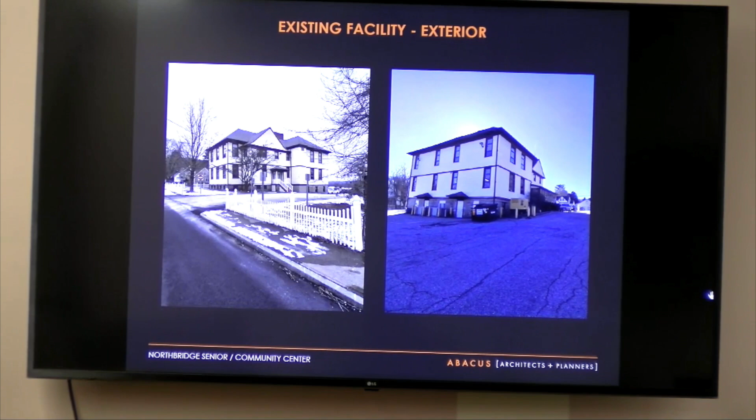So the existing facility, you're here, you know what this is like. It's kind of a handsome building, but never ever today would you design a senior center like this, as handsome as the building is. Whoa, it's 4 feet above the ground.

If you have mobility issues, it's pretty tough. It's actually a 3-story building.

Again, not great for mobility issues. The site is small, practically all covered with asphalt for parking, but there's not enough parking space and not much left for green.

And we know parking's important, but green's really important for physical and mental health, and there's no place to put it. The interior, you know it because you're here. Sure, it's functional, but there are some odd-shaped rooms that don't facilitate flexibility in the kind of activities and the number of activities that Kelly and her staff could have moving forward in a town this size.

So, floor plans - these may not be familiar if you're not an architect, but they're buildings with good bones. You add a little here, you renovate there, you can make it work. This building has bad bones for a senior center.

Meaning, if you tore out all the walls, it didn't really make sense. The roof would collapse. There's nothing left. The kitchen's right in the middle.

Well, you can't see why I point like that, so you're always walking around the kitchen and up and down stairs and up and down the elevator. I mean, you know this.

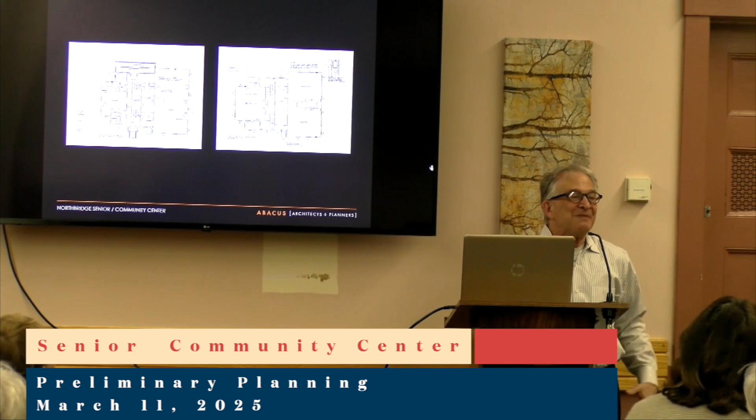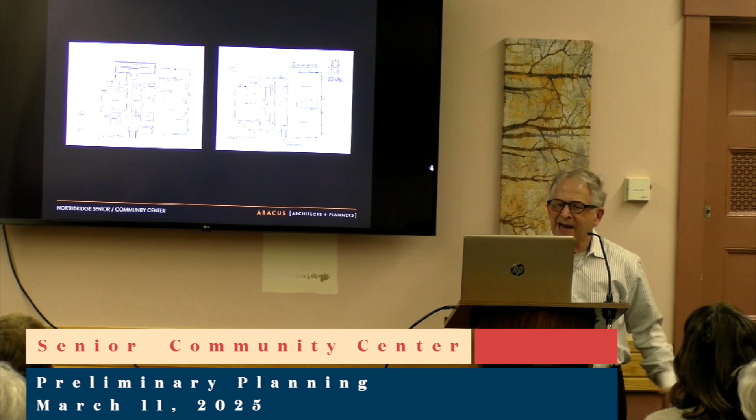And the offices are spread all over, not because the people here don't like each other, but because there's no place to aggregate offices together in a way that really works. If this is easily resolvable, it could be resolved right here and right now, but that doesn't seem to be the case.

So the limitations of the site - it's away from the town center. If you live a block away, it's a perfect location. Most people in most places want to be near where they can go shopping, the bank, and town hall. You're pretty far away. It's a small site with little green space.

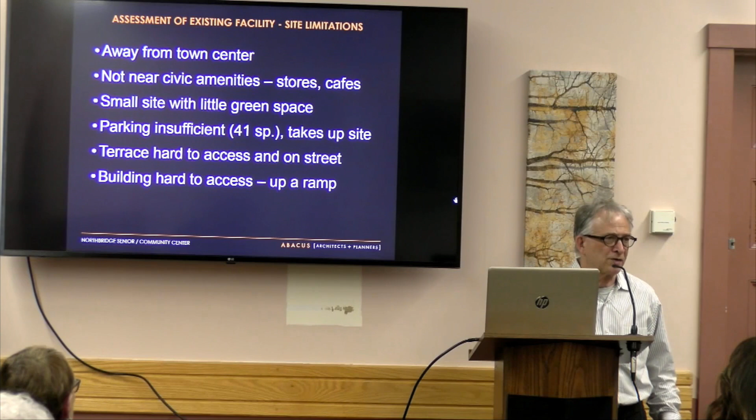Parking's insufficient. There is a terrace, but it's hard to access - it's right on the street. And that ramp, they did an okay job doing the ramp, but if you didn't need it, I think everyone would be a lot happier.

The building limitations: 3 stories tall, the entry's really cramped, offices dispersed, things are hard to find. What we hear over and over is, I want to be able to walk in the door and see what's going on and where my friends are. The convoluted hallway, the kitchen, 8,000 square feet.

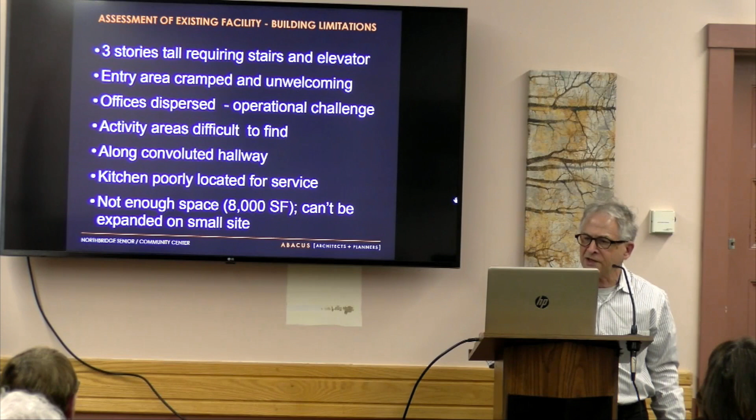And this is sort of rough, because the basement is as big as the building, but there's only this much usable space despite the best efforts of Kelly and the staff to make use of it. So those are some of the limitations of programming.

What we hear over and over again is, I come for the yoga, that's 45 minutes, and 2 hours later I'm still here because I'm hanging out with my friends. This doesn't facilitate hanging out the way community centers, senior centers, high schools, office buildings do - it doesn't matter, people kind of want the same thing.

And there's poor connection to nature and the community. If you could walk outdoors and be in a wonderful green terrace and do yoga outside... but ain't gonna happen here.

So this is basically saying it's not working. People are trying hard, it's not working. So that is, one could say, that's one reality: you have a senior center that doesn't meet today's needs.

And guess how the demographic trend lines are going? I don't know about you guys, but I'm getting older, and my friends are getting older, and there's more and more need. A building that's too small isn't working.

The good news is 44 Cross Street is a town-owned piece of land that's significantly bigger, and there is the opportunity to do a new senior center there. So that's what we've been studying.

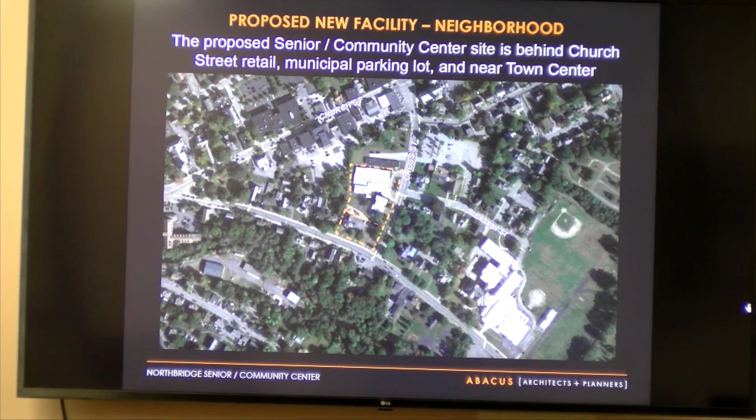So there it is. The school is that big white block within the orange outline. That school is going to disappear, and the contract - there's a demolition contract out there - so that big white blob, that will be gone.

And the red outline shows the outline of the site. There's a town-owned property to the left and a church on property to the right. We've been having discussions with those people, and there may be the opportunity to work together. You know, what form that takes, we don't know.

So far, our investigation has been saying, let's just stay within the red outline, with that big white blob having disappeared. You see all of these squiggly white lines - that's the topography.

Every line is a foot rise in the ground, so you can see at the corner of Linwood and Cross Street, you're not going to build much there. It's really steep, there are beautiful trees that will be preserved. Where the school is, it's reasonably flat.

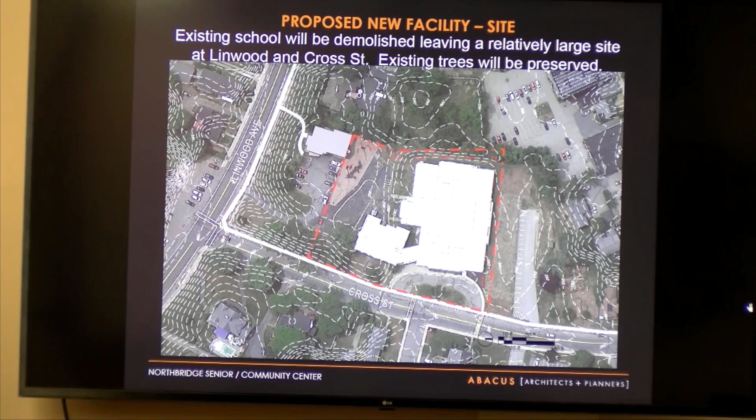I think we'll bring in a civil engineer fairly soon, and we've already worked with the civil engineer on this site, just to make sure we're recognizing the slope appropriately. So you don't have to pay attention to the squiggly lines, but it's a slope site and we know it.

So the goals for the site, this comes out of discussions with Kelly and Adams and other people: adjacent to commercial, civic, educational, religious uses, large enough for all that stuff we talked about, for parking, terraces, and green space, outdoor recreation, to be able to do exercise, to have an exercise trail. You don't want that in the parking lot of this building.

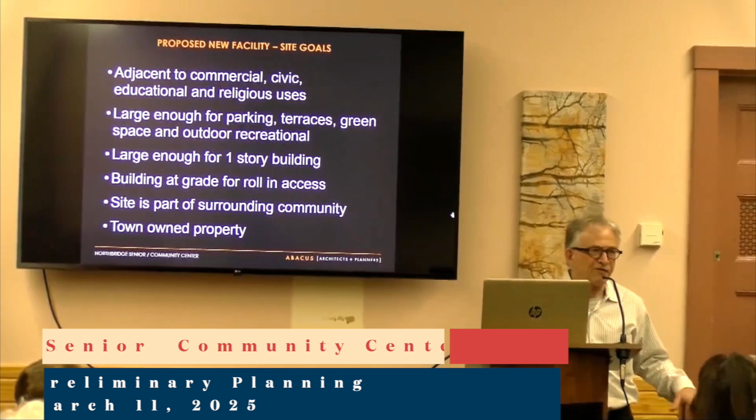Large enough for a one-story building. If you imagine this building, which is too small—this is 8,000 square feet—spread out in one story, you need a bigger site, which we've got. Building at grade, like 100%, you've got to be able to roll in, part of the surrounding community. One of the punchlines is that last bullet point: town-owned property.

We've worked with a number of towns who want us to do programming and planning for a senior center and community center, and they ask, where's the site? We don't have one yet. We want you to help us, and sometimes find something.

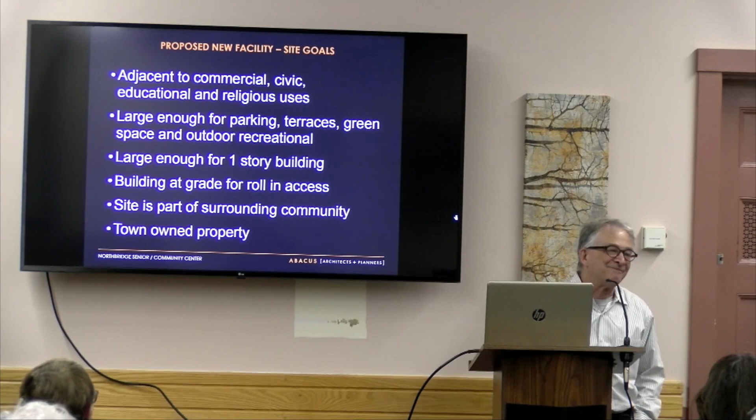I've been jokingly telling people in the other town—this is a joke—maybe you can build your new community center in Northbridge. They have a wonderful piece of property. They laugh, but they don't think it's very funny. So to have a town-owned piece of land that seems appropriate is a rare gift in Massachusetts.

Building goals: cluster the offices for efficiency and welcoming reception. You really need to have people who are working for you, working together with each other. That provides a kind of security. There are different kinds of things that happen in the office that you don't necessarily want everybody to know. Maybe there's a back entrance to the office.

For a lot of people, the senior center is the place they go to get someone to listen to them, to talk to them, to bring up issues of concern. Grade school, high school, college—people of every age have these issues—but often as people get older, there's less access to the kind of help they need, and this is the kind of place where you get it.

Easy to access kitchens in the right place, and a range of program spaces that are flexible, that you can open up walls or close them down. So these are some of the things that were established before we started designing, coming out of our discussions and just what we've heard over and over.

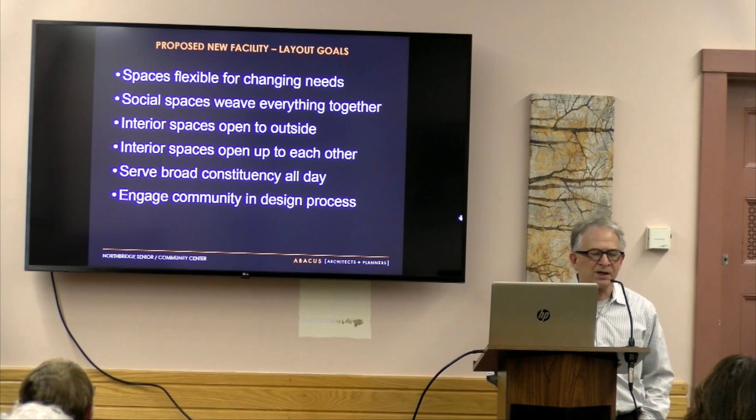One of the ideas is to engage the community in the design process, and that's what we're here for. So activity options—here are a bunch of pictures of stuff that could happen here. And if you say we need a swimming pool, I will write that down, but I'll say right now, you ain't gonna get that.

But, and who knows, it's not my decision, you can bring it up, we've had towns where there is a constituency. But what kind of things do you want to do here at a new facility that you could do here and want to make sure you don't lose the ability to do, or that you can't do here and really want it built in?

Arts, recreation, any thoughts on that? In terms of things that you do here that you 100% want to see carried over there, or something you're unable to do here that you'd love to see there?

We can wait to the end, or you can bring it up now if you want, or Kelly can take a survey at some point. We can leave paper out at the front desk and people can fill something out, maybe a brief survey.

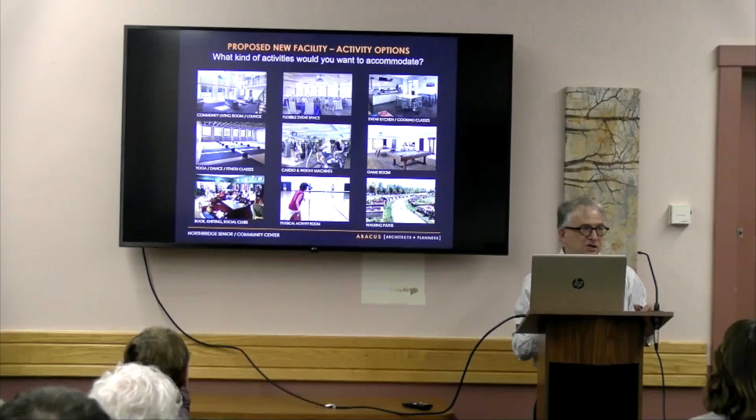And those are often the most popular places. There are people who come to senior centers and community centers to hang out with their friends, take a class. Not that people can't do events or other things, but they feed off of each other. So that's a great thing.

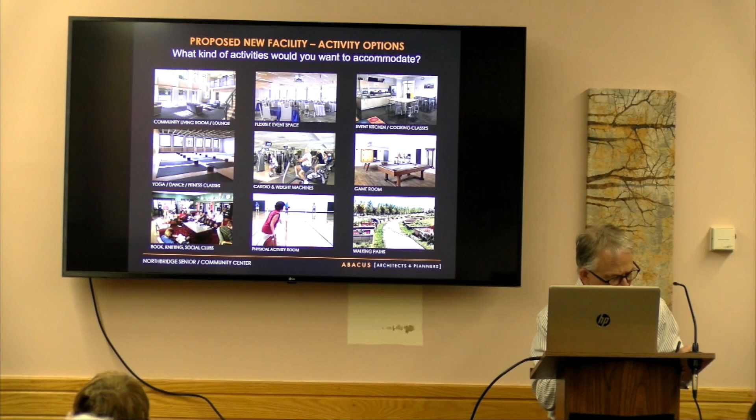I think the outdoor space is really what we're lacking here at the senior center. And I think that's a huge thing, to have an outdoor space where we could have outdoor events. We could have the old-fashioned picnics that everybody's so used to, back in the day. We were talking about outdoor gardens, things like that. Those are things that we really wish we had here, and we 100% do not.

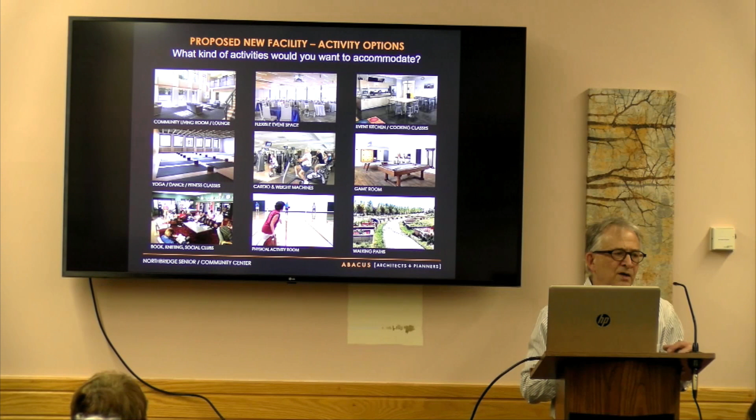We tried putting a little patio in the front, and the noise is so bad with cars running by. I tried having a concert out here, and we couldn't even hear. So outdoor space for our senior population, I think, is huge.

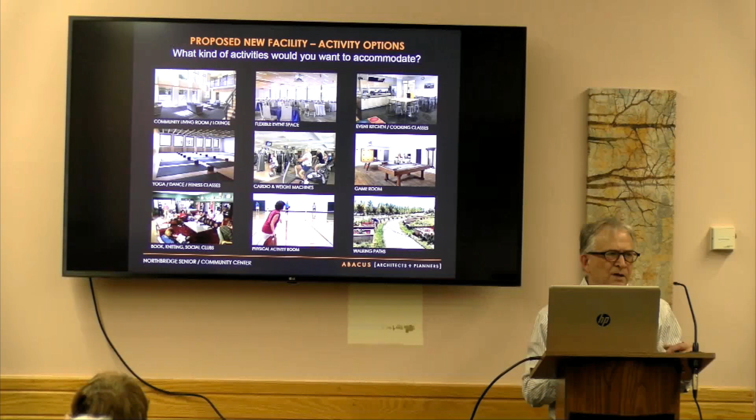That would be the best thing, yeah. I think that would be the best thing for our seniors. And the good news is the site's big enough that it can be accommodated. Is there? Well, maybe we should. This is really great, if you come up with other ideas, bring them up.

Maybe I'll go forward and sort of show you what we've been thinking of. So, working with Kelly and Adam and others...

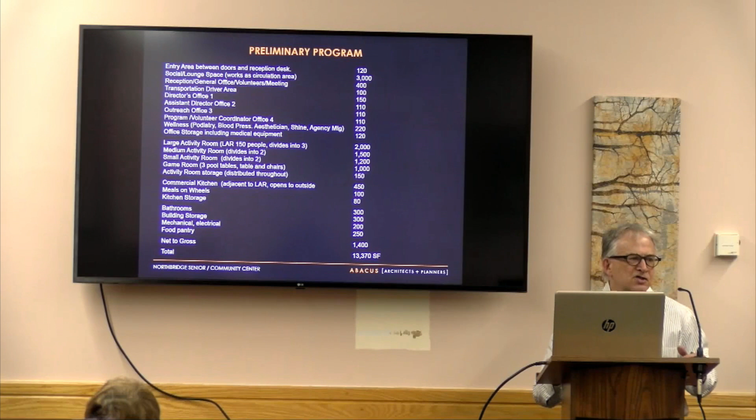Building design starts with, you could call it a program, a list of spaces that are the starting point. They're not the ending point, but how much space do you accommodate? So we talk director's office, assistant director's office, outreach office, a wellness center, office storage including medical equipment. These are all kinds of things that's easy to forget or lose track of, oh, 2 offices is enough.

Well, actually, it's not. And then you'll see in the second block, large activity room, medium activity room, small activity room, game room, and storage. And you'll see in the plans, these large, medium, and small rooms can be divided into thirds or into half. A commercial kitchen, meals on wheels, kitchen storage, and then bathrooms, building storage.

So this was the starting point. That's 13,300 square feet, net to gross. You know, next to the last line, walls have thickness, you've got to build floor space. And this came out of the discussions, but it's in line with what we're doing elsewhere.

I mean, you know, nobody feels like they can live with 9,000 square feet. It's like, oh well, we're gonna have to do an addition next year. There are senior centers, community centers that are right-sized. Within a week, they're too small, because build it and they will come. Suddenly, you don't have enough space. So this seemed like the right balance, given that it's expensive.

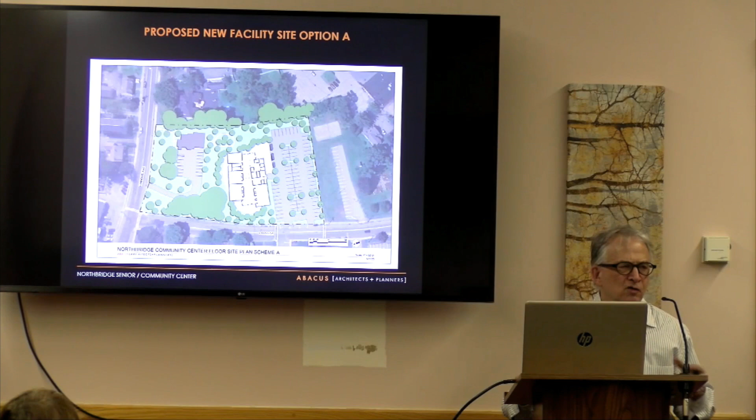So this one, and I'll describe these in general terms, there's, to the right, you'll see a parking lot. There's something like 74 parking spaces. So, you know, is that the right way to do parking? It's obvious where it is, it's easy to find. You know, you're looking at it from Cross Street, but it's simple.

The building is to the left of that, and I'm going to show you the plan. So the building has a fairly narrow face along Cross Street, because a lot of space on the right is taken up with parking. And, you know, to the left is the old school headquarters. We're sort of leaving that alone.

And, you know, a simple way to divide the site, you'll see to the upper left of the school, you'll see this sort of ovally thing. That's to suggest there's a walking path, you know, it's an outdoor space. You know, there are a lot of opportunities.

And I'll go to the floor plan. So you have, call them 2 bars, those yellow blocks. The one on the right, and the upper left is a curve. That's a reception desk, and the offices are there. Oh, and I should say, you can see those 3 rectangles.

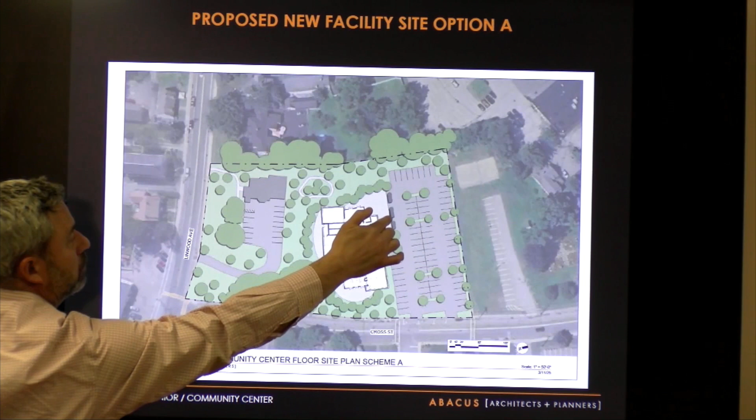Like right here, that's a drop-off. So the access would come in, and then drop-off areas right in here, and then you can exit, or park. Right, so you get dropped off. There could easily be a canopy.

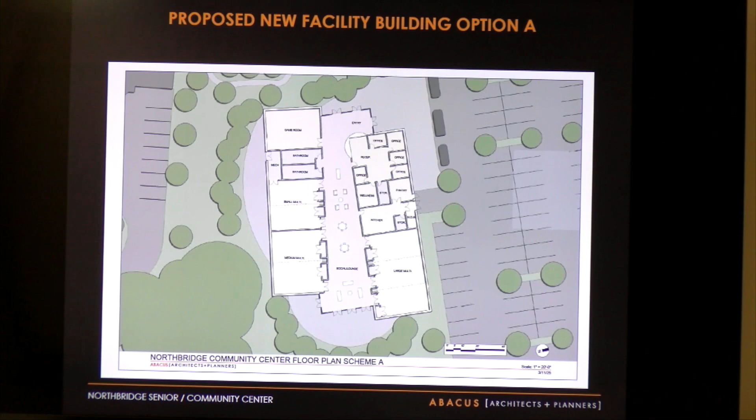You come in, there's an entry, there's the reception desk. People like to come in and have a reception desk, and the people who work there want to know who's coming in and out. It's an issue of safety, of accountability.

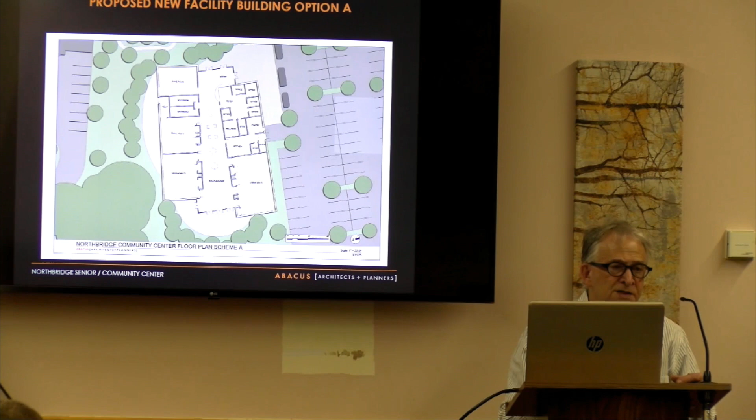And then coming down from there you can see tables and chairs, you could furnish this in a lot of different ways. You could have seasonal decorations and a Christmas tree. I hate to use this terminology, but people understand it - it's the shopping mall model, except it's not about selling things. There are the stores, but people wander down the middle, they sit down, they meet with their friends, they get ice cream. So this is hardly fully developed, but that's that meandering space that goes top to bottom.

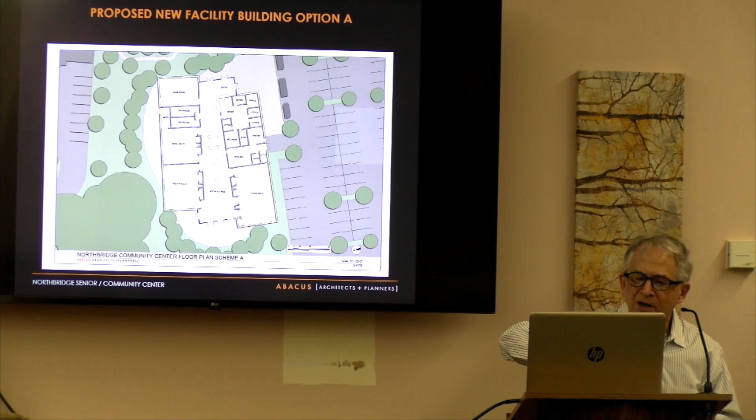And then there's below the center corridor, essentially, with options for rooms on either side, with sitting areas. And then here's the kitchen. There's a separate place for deliveries. Here's the kitchen storage, meals on wheels, and then this is a large multi-purpose room.

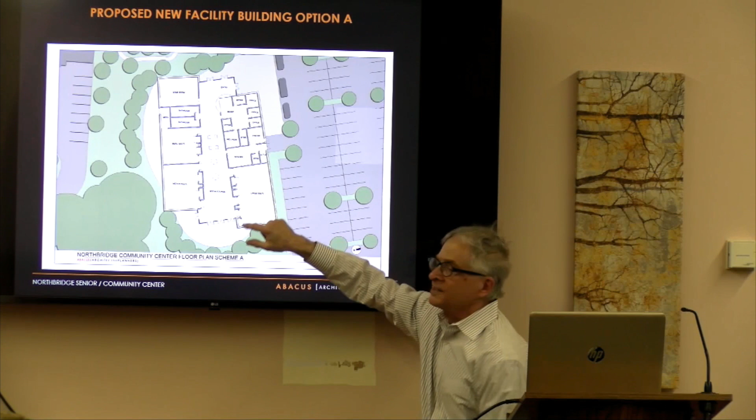It can be divided up into 3 or into 2, or a big event for 150 people - you leave it open. These are closets for storage, so tables and chairs here today, gone in 5 minutes.

And then here are glass doors, glass doors, glass doors. So if you're sitting here, you get a sense of what's going on there - oh my gosh, look at what we're doing, that looks so much fun. And we can have more glass, less glass, but that's the other thing that makes it the shopping mall model.

It's about window shopping for activities. Have you put in a space for the food pantry? Yeah, the food pantry's right here, next to the kitchen. And don't get overwhelmed or nervous about the number - this is just the initial plan.

Did you talk about a food pantry, or a pantry for the kitchen? No, food pantry where we give food out. Yeah, that's in there, that was on the program and it's in all the plans, because we understand how important it is. And here it is, right next to the kitchen, so a truck can pull in and deliver to the food pantry, and deliver to the kitchen.

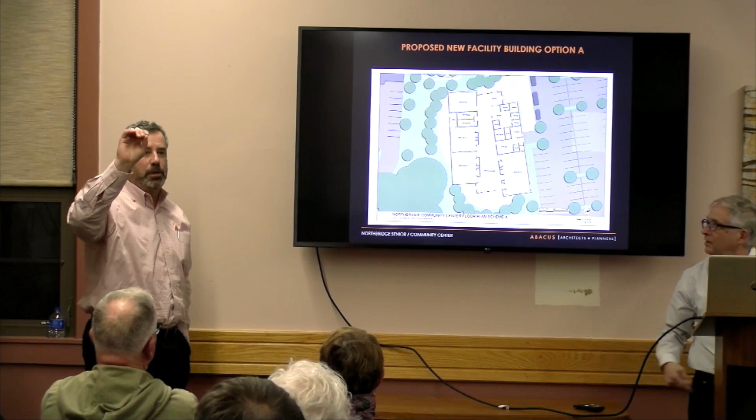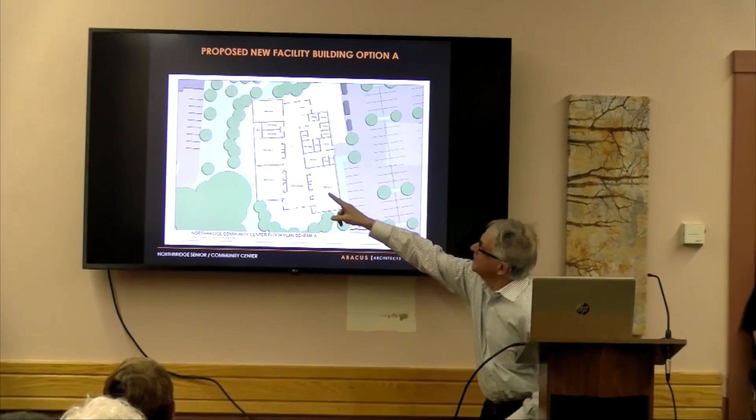In the upper left is the game room, there are bathrooms, and then a small multi-purpose room they can split in two, and a medium multi-purpose room. So people were talking about places for performance, they were talking about places for meetings. So you open the sliding partition and you can have a meeting with 60 people, you close it and you have 2 meetings with 30 people.

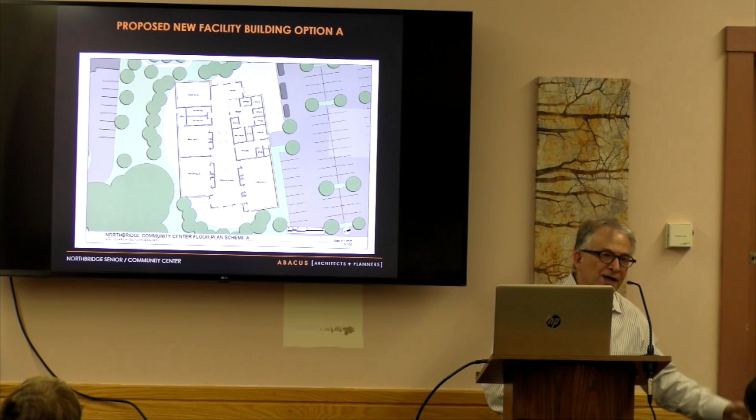And the idea with the closets is there are easels in there for the painting class, you put them back and pull out the yoga mats. It's really flexible and easy because storage is everywhere and partitions are everywhere.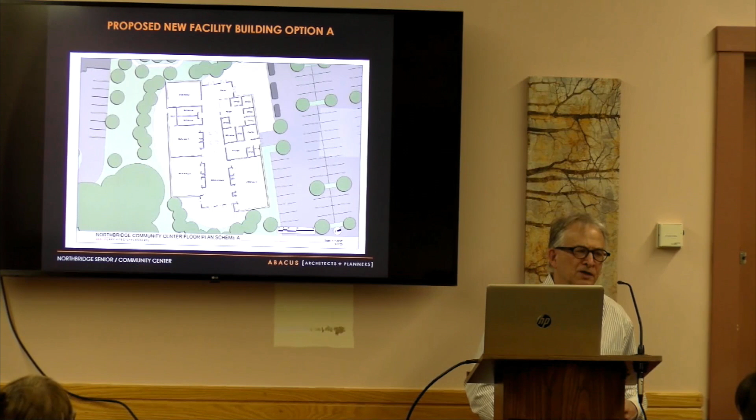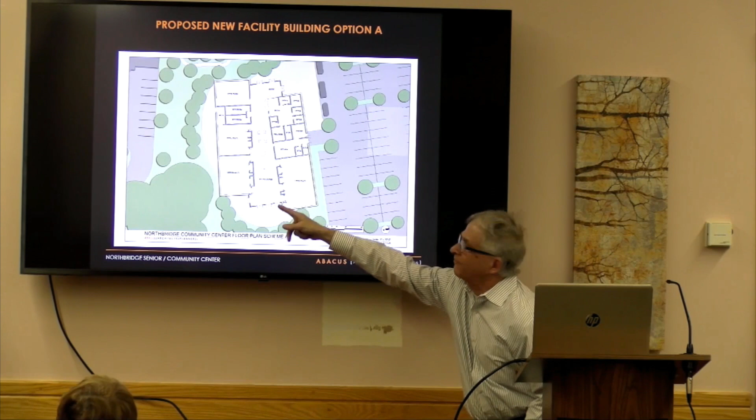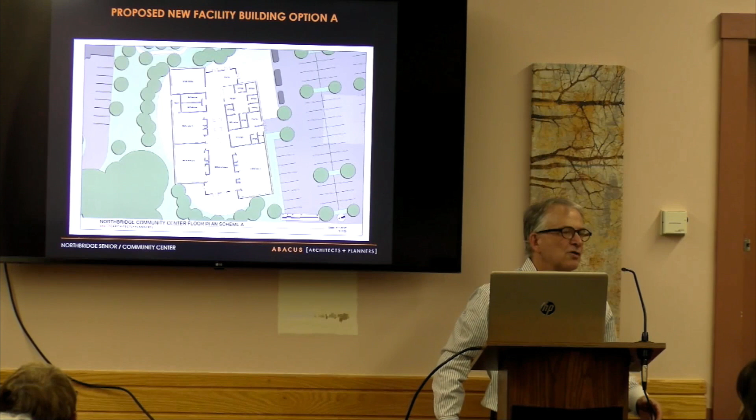And then these outdoor terraces, so you can come out from the social space lounge, you can come out from the multi-purpose rooms and sit outside in that oval. You can do yoga out there, and on the far left, there's a bigger curve - it's also an outdoor terrace with the idea it spills from the inside to the outside, and for the drop-off there's a fairly big terrace.

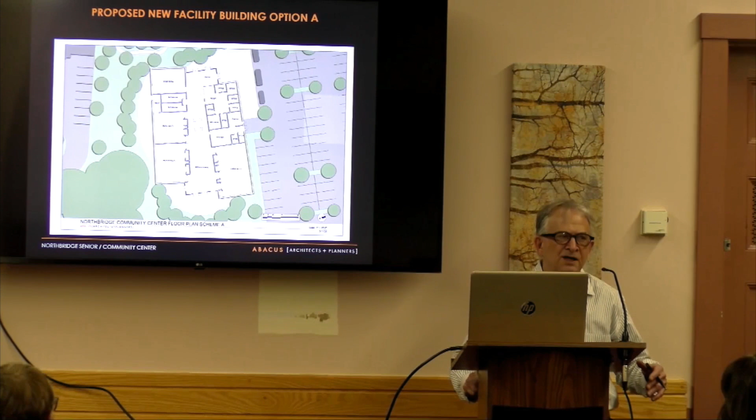Is the terrace too big? Is there not enough green space? I mean, there are all kinds of things, but really it's about making social connections and connections to nature, kind of woven into this.

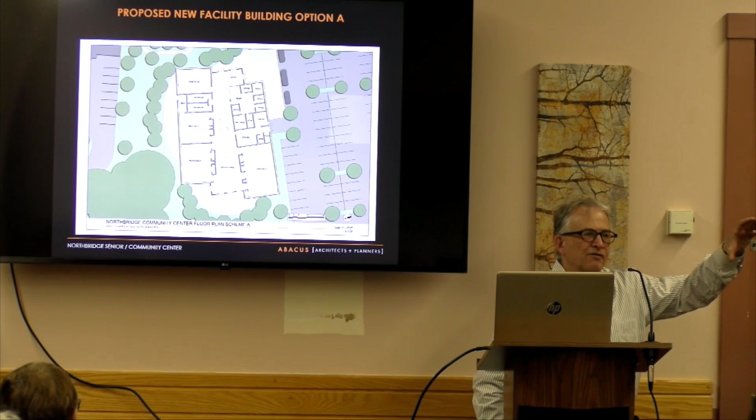And you'll see some community center programs with hallways, 1,600 square feet, 8 feet wide - who needs that? This is 0 square feet of hallways, because the social space isn't a box that you go inside, it's a connective tissue that ties everything together. And some people are familiar with that, this is why I say shopping malls - some people, shopping malls are the only place they see it. Schools today, you don't see 10-foot wide corridors lined by lockers anymore, because it's no more popular today than it was when we were kids.

And I was on the Mass School Building Authority Designer Selection Panel, picking architects for schools. So I've seen like 120 school plans in the past 8 years, and the designers talk about exactly the same thing.

The issues just resonate as being timeless issues: getting close to other people, having fun, a place to curl up with a book. Seems like that's a timeless thing. If anyone says, I hate that stuff, I'll write that down, but people tend to be sympathetic to it.

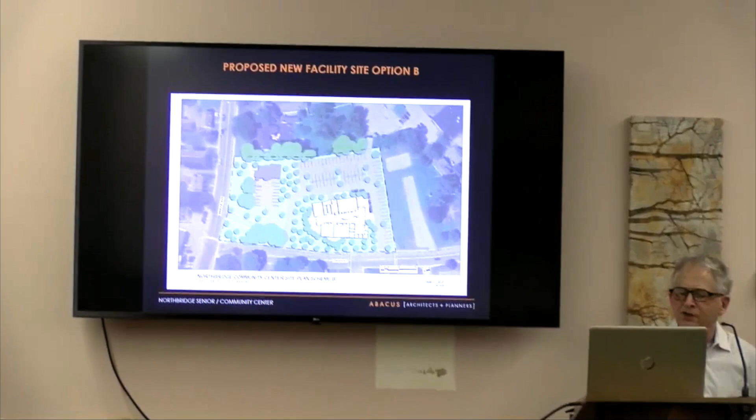So here's another version, and you can see the parking is primarily in back. You can come in from Cross Street, but rather than seeing 120 feet of asphalt as you go down Cross Street, you see a fairly narrow band. The parking...

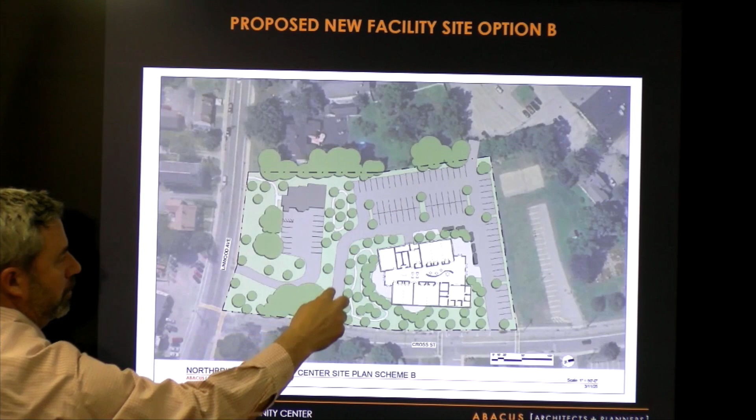You could say the downside is that most of the parking is hidden, and you could say that's the upside - most of the parking is hidden in the center of the block where you're not staring at it. But because there are two drives, there shouldn't be confusion about a way in and a way out. It's not particularly confusing.

In the upper right-hand corner of the building, you'll see there are 5 cars there - those are drop-offs. And you'll see these squiggly lines to the lower left of the building suggesting playground, shuffleboard court, you name it - horseshoes, that seems to be really popular, and there's all kinds of stuff you can do.

You're not cut off, but you're sort of separated enough that you can have a quiet conversation. So that space could take all kinds of forms, and it can be flexible - get rid of the S-curve and put in the Christmas tree and bring it back.

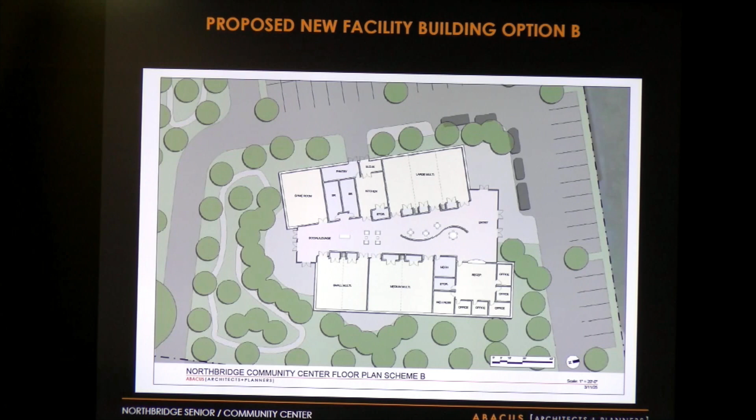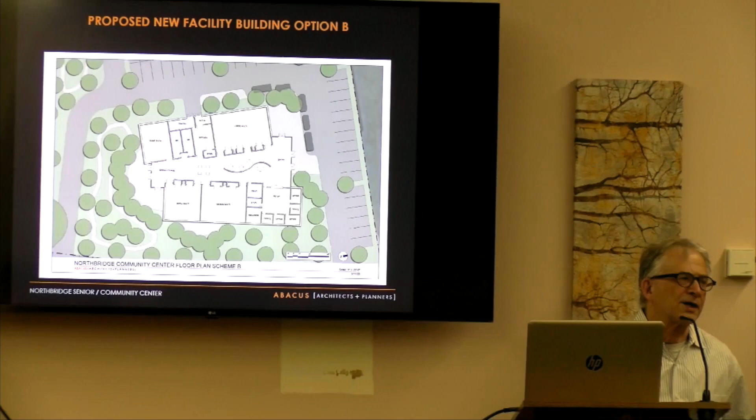One thing to note is this is really typical of senior centers - the large multi-purpose room is next to the kitchen. So on a typical day it becomes 3 rooms, and 1 room is used for daily lunches. That's a common thing. So next to the kitchen, the tables may be there 4 days out of 5. You only get rid of the tables if there's a big event.

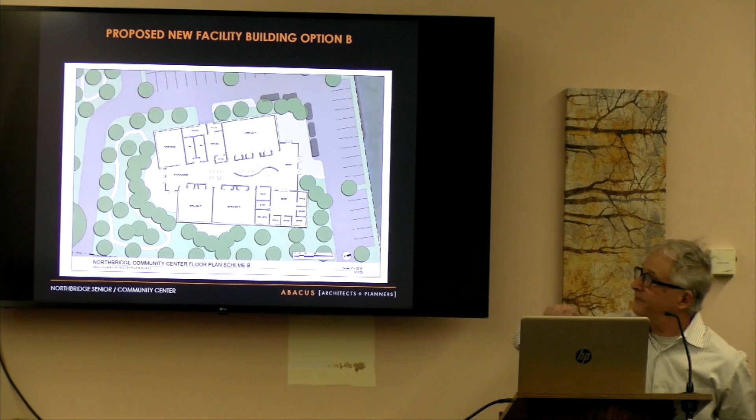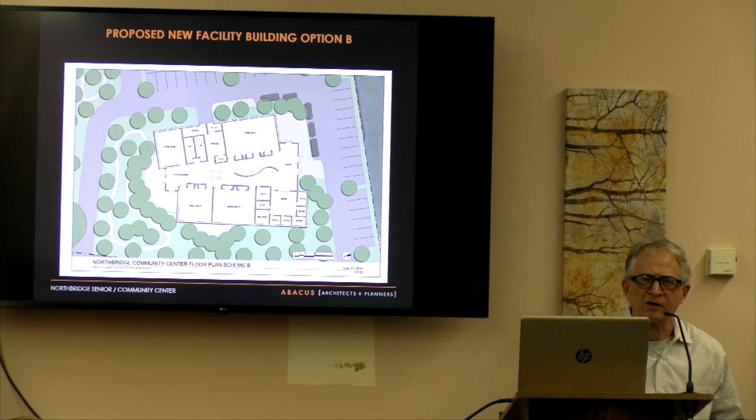But then you have a big dinner for 150 people, you open it all up, and the kitchen is where you need it. The kitchen can serve the social space, but it can also, as you can see at the top center, serve food to the outside if there are activities, and there are places for a truck. So this is about, like in your house, the kitchen in many ways is the life of the party. You want it to disappear when it's filled with dirty dishes, but you want it to connect to everything, practical under different situations. Similar considerations here.

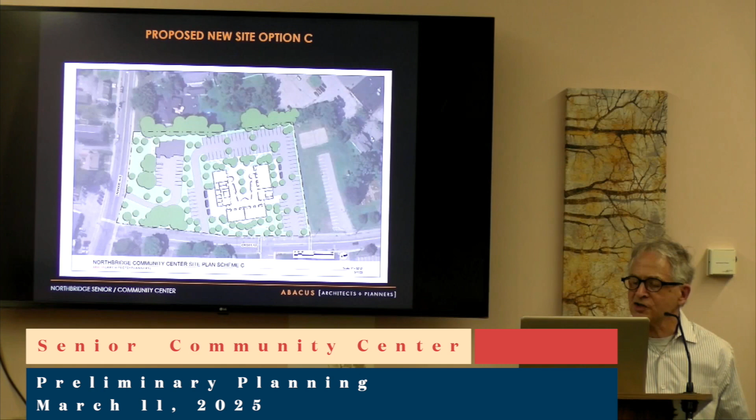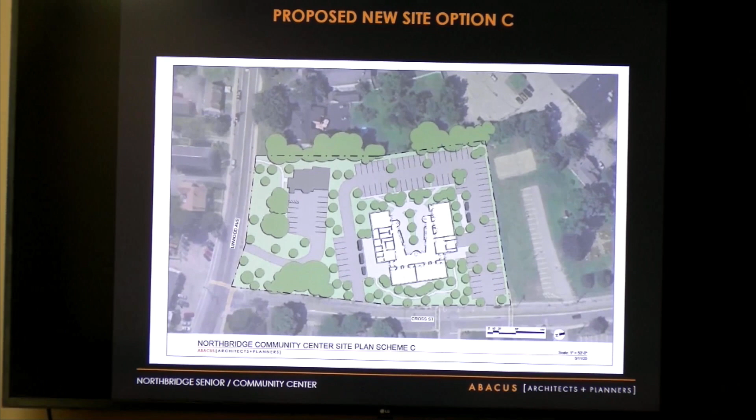So this is a bit different - this is a U-shaped building around a courtyard. So the other two, the main focus was that interior space sandwiched between the program areas. This says, what about focusing on an exterior space? You know, this is not San Diego, but it is beautiful weather 6 months out of the year, and even if it's covered with snow, you could walk out there, you could look at it.

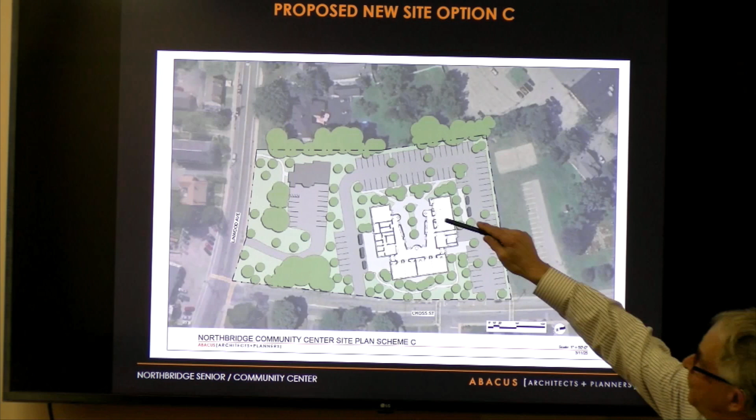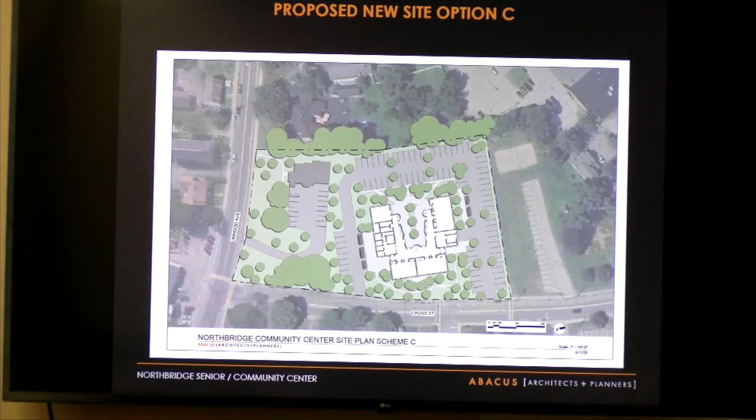And then wrapped around is social space. It's not so much a big social space that's divided up, but it's a kind of a winding pathway with little places to sit - that's what those circles and bump-outs are. Along the bottom are small and medium multi-purpose rooms. Upper right is large multi-purpose room and kitchen, and then offices here next to the drop-off.

So all of these have essentially the same program. This is not about small, medium, and large - do you need 10,000 square feet, 13,000, or 16?

I think we sort of said this seems about right. That doesn't mean you couldn't reduce or enlarge the size, and there's nothing cast in stone about small, medium, and large multi-purpose rooms. But given that you can divide those up into smaller elements, something like here could be the computer area. Any of these, you could set up dedicated areas for smaller things like that.

So none of this is like we're done here. This is just, it's just more than a skeleton.

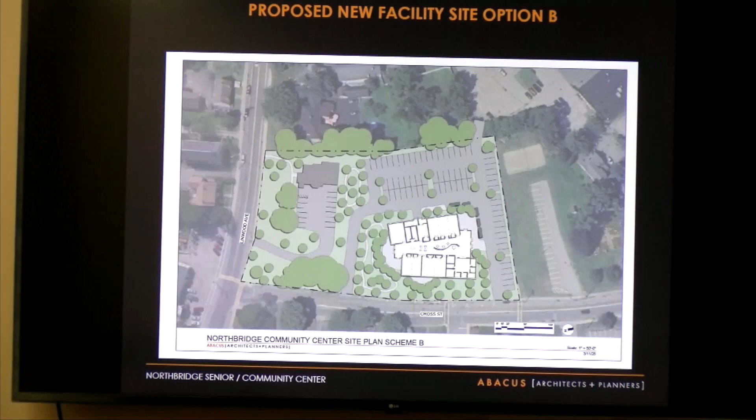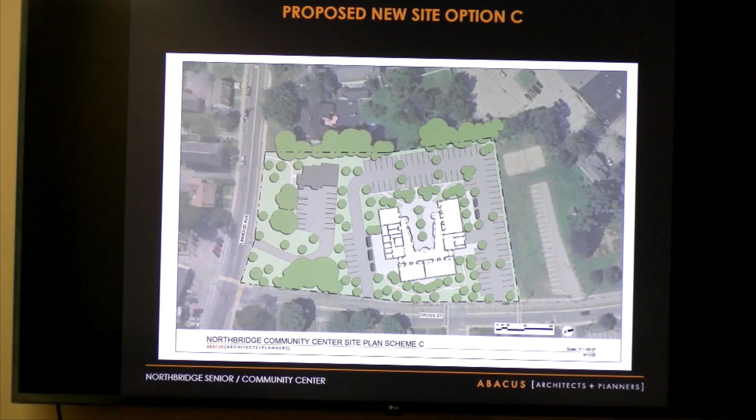So if you said that the first scheme has a narrow face along Cross Street, this one has a wider face along Cross Street, and then this is about a courtyard. You can see the parking wraps all the way around it, some on the left, some on the right, some in the rear. It's a loop parking, so it should be fairly easy.

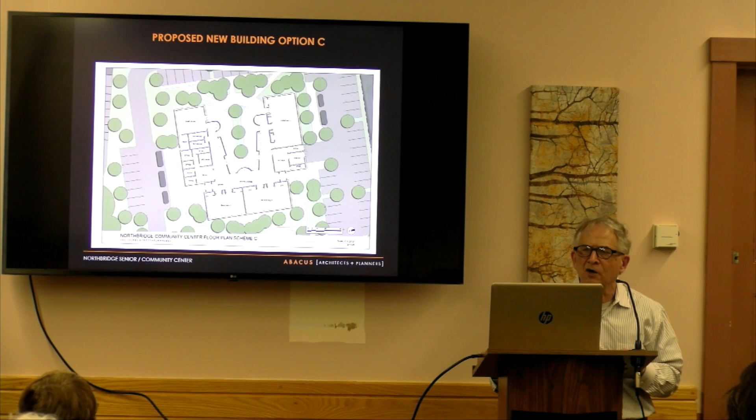And then here's the enlarged version. So maybe now's the time to say, does this seem like three different versions, or one could say the same thing? Are there things that are missing here? Like, why don't you have this or that? Any sense of, you know what, I don't want to see that parking along Cross Street. Any comments? My question is, okay, your turn.

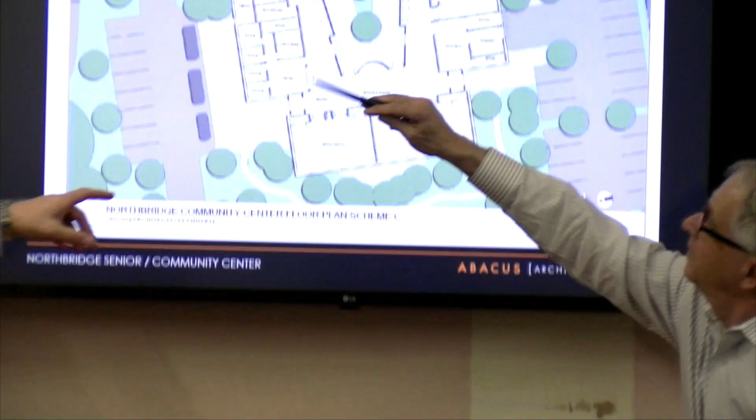I have a question. Where are the bathrooms? Outside. There are the bathrooms here. Point it again, please. Okay, where's the kitchen? The kitchen is right there. Too far away. You need more bathrooms. Yeah, you need more bathrooms.

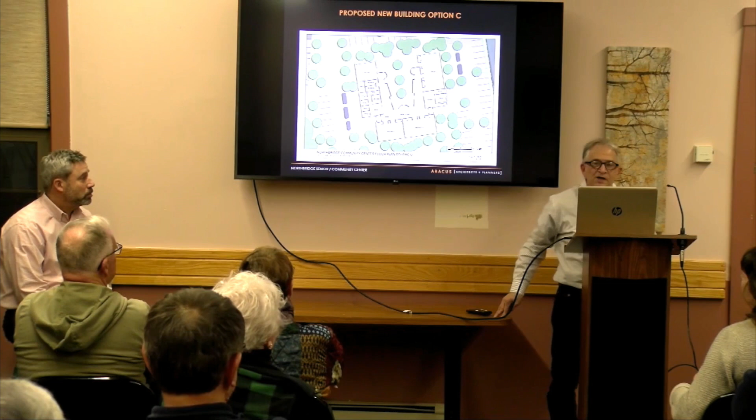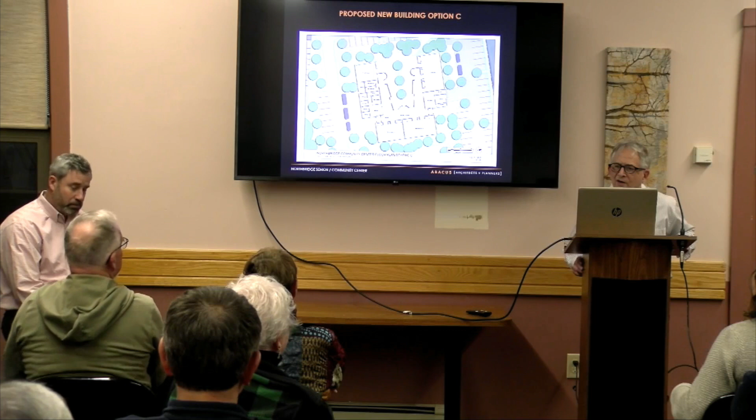And so here's, they don't have to be male and female, they can be whatever. And make sure that they're handicap accessible. Yeah, and I also was looking at it, thought many times that you can attend to it, someone has an accident. Yeah, okay, and you need to have a place to clean up.

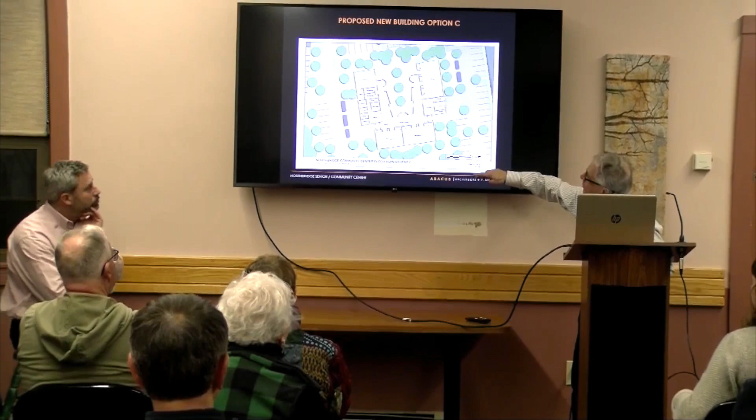So one of these bathrooms, or a small room, could be accommodated for blood pressure taking, for podiatrist, for a shower, and clean up, or just because somebody feels a little bit woozy, we need to have some kind of a medical area. There is, in all of these, a wellness room that's part of the office. I'm talking about a separate one, not... It's walled, it was all walled in, one entry. One entry from the office.

One of the biggest things that you need is to feel secure, safe, and privacy. Yeah, sitting next to Kelly's office, having to bring somebody in to have a shower, no, not gonna happen. So do you feel like this is a room that you shouldn't have to go through the office to get to? No, what I'm saying is these are things that should be incorporated. Yeah, that, you're the architect, you can figure out where it needs to be.

But I know that if you're in the far end, like down here, this is a small area. But if someone's down here and they have to use the facilities, they have to come all the way through this way. With this plan, if you put the bathrooms, they don't need to be gigantic things with fancy anything, just a stall. Yeah, they're the farthest away from the dining area. I'm sorry, say again? The bathrooms are the farthest away from the dining area.

And that's what I'm saying, under this design they need to be readjusted so they're in the proper places. Yeah, so let me ask you a question. I mean, this has not been, this is very much in flux, which is the reason we're here.

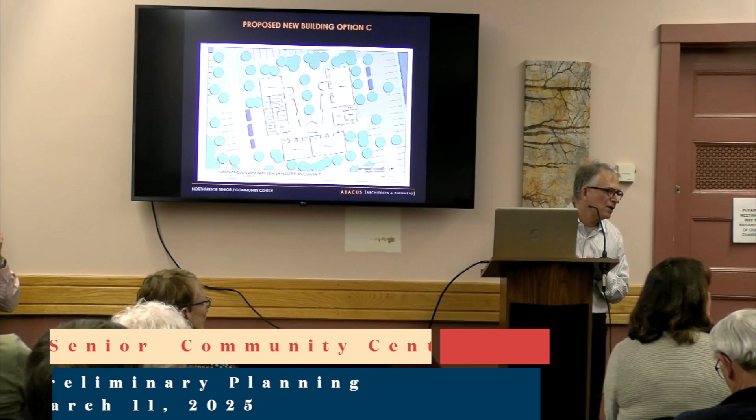One of the things I noticed in a lot of commercial buildings, there's never enough bathrooms for women. You see a long line for women, and the guys are in and out, you know?

Well, building code has changed. We're doing a recreation center, and by the building code, there need to be 7 toilets in the women's room and 3 in the men's room. And our clients are like, whoa, what's wrong with you? But anyway, yeah, that's been a common problem.

Yeah, and hopefully we will get to the point where we can... for the moment, these are really good comments.

Some of us who have assistive devices for walking, whether it be a cane or more seriously a walker, it's very difficult to get it into a stall. Or to even open the door, right?

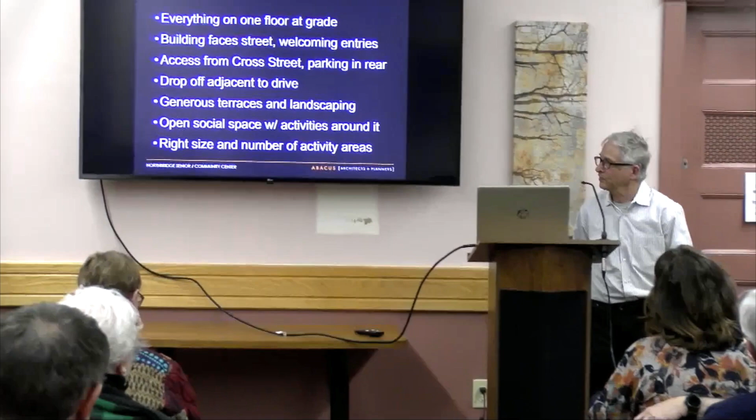So these three versions have a lot in common: everything on one floor, facing the street, access from the cross street, drop-offs, a generous terrace and landscaping, open social space, and the right size and number of activity areas. We think we're pretty close. The differences are orientation in relation to the cross street, location of drives and parking, the relationship of program spaces and social spaces, the relationship of interior to exterior, and the layout of terraces, greens, landscape, and pathways.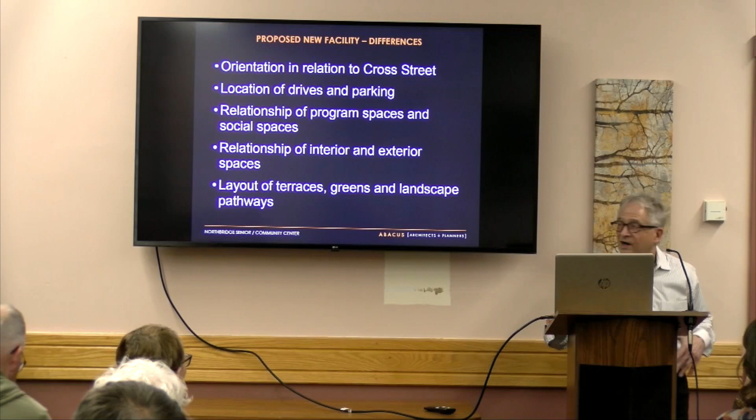I haven't heard anyone say I hate the courtyard, I love the courtyard, I like this orientation or that orientation. It may be that everyone's fine with all of them, which is fine. We can have a conversation, but if there was any sense like, oh no, this is a much better direction — let us know.

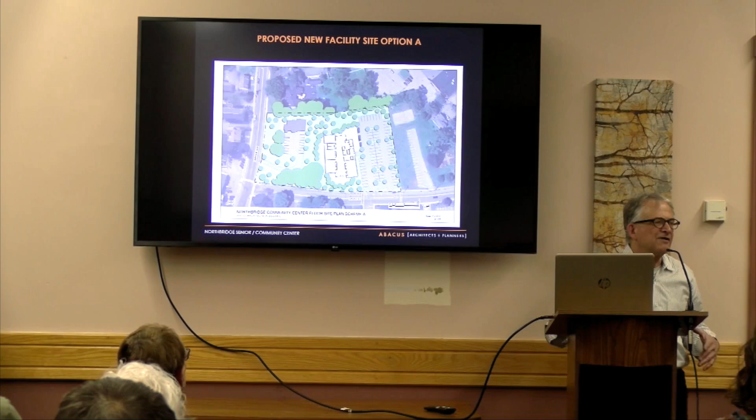Is there any difference in the amount of parking? It's about the same, about 75 parking spaces. If there was a little under, we could add a little, so there's nothing fundamental like, oh, we can get a lot more parking.

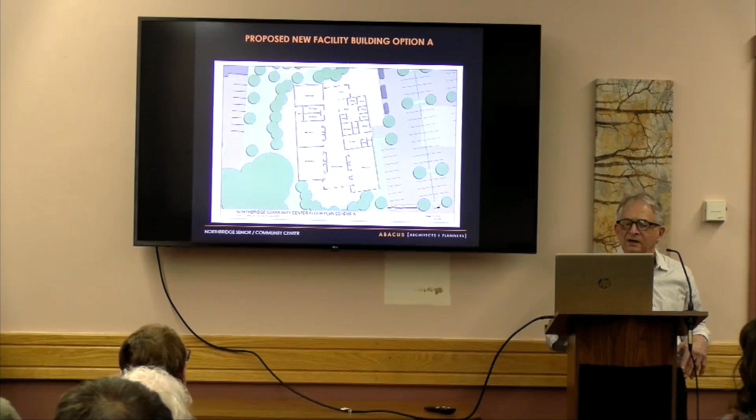Oh, one thing I forgot — just in the upper right-hand corner, there's a suggestion you could connect the parking lot for the senior center with the municipal parking. Not all the plans show that, but that's at least a number. So the town owns the parking behind the buildings on Church Street.

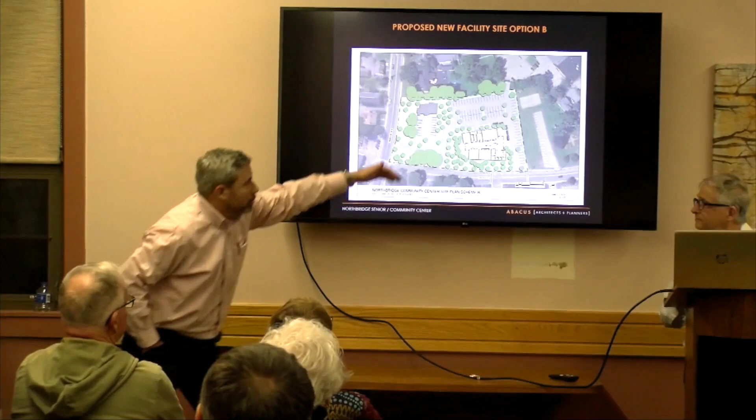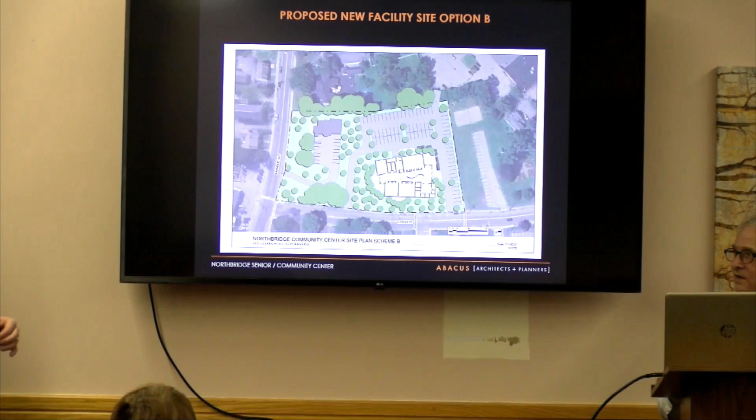In this area here — is that behind Clifton's? Correct, yeah, behind Clifton's and then heading up Church Street towards the light, which is obviously over here. The town bought land there and has easements, so there are egresses going in and out on Church Street. One suggestion would be to have either pedestrian or vehicle access, since there's additional parking over there.

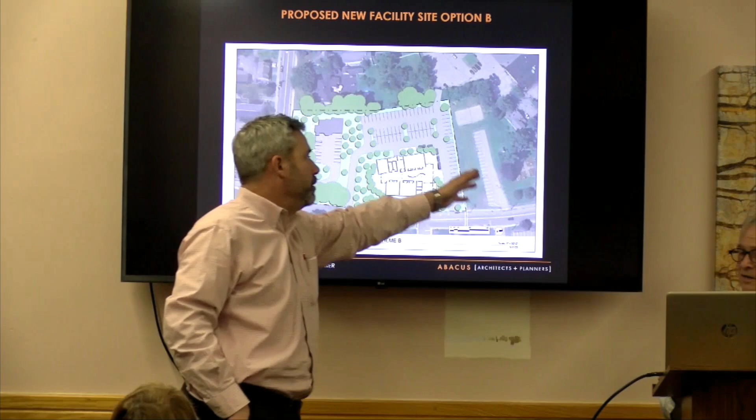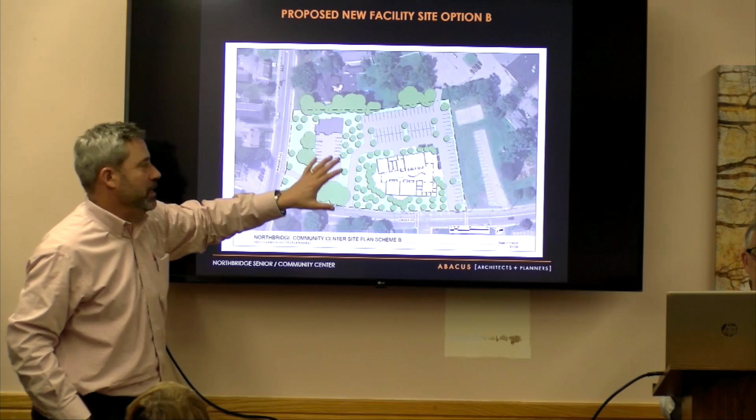We've also had discussions with St. Patrick's about sharing parking for events, for additional parking. And depending on what ends up here, at certain times, this parking will be available too. So we have the opportunity for 75 plus 15, to 90 plus 25, plus whatever.

And in addition, I just want to point out that two of the neighboring locations or organizations are churches that also have parking lots. We've had conversations with them as well about partnering. We're there during the week, they're busier on the weekends. There's a lot of room for partnerships there, so that would be another win, I think.

One good thing is we have almost twice as much parking as we have now, shown on all of these. Plenty of green space, one-story building, it's not so bad. One conclusion we could draw, these are really good points. The points are primarily about important but small issues, so maybe we're on the right track. Maybe this is about right.

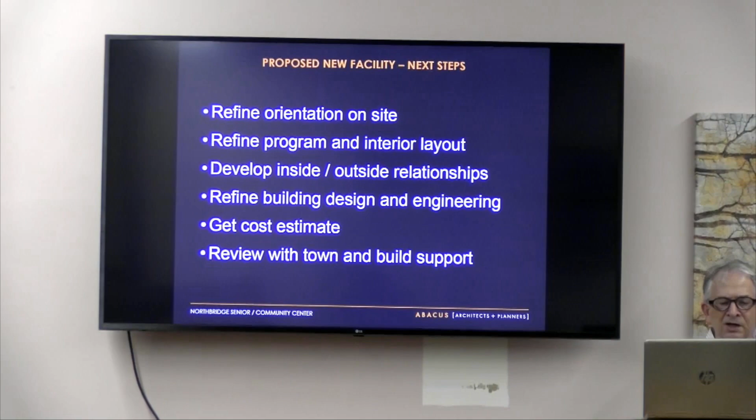It's not going to get built tomorrow, but it is going to get developed further. Let me just go through this: next step, refine orientation on site, refine program, refine inside-outside relationships, refine, get cost estimate, review with town, and build support. So this is getting pretty real.

Yep. I'm just gonna step in. Okay, if that's okay? And then you're gonna stick around in case we have any questions? Yeah, because I think there's only one slide after, right? Yeah.

So again, for anyone that came in late... you haven't said anything. You got the parking though, remember? My question was about parking. You got the parking. My turn, thank you.

Hey, I'm a taxpayer, I pay your salary. And you work very hard and you earn every penny.

Now, talking about parking, something that has nothing to do with the building, but it involves snow. It still snows here, and snow is very near and dear to my heart. In thinking about parking, you gotta find a place to put the snow. I'm not making suggestions, I'm raising that as an issue. In the design, figure out where those poor guys who've been up since Tuesday at 6 a.m., and it's now Friday, now they gotta plow all the municipal parking lots, and they gotta put the snow somewhere. That's the first part about parking, just figure out where you're gonna do that.

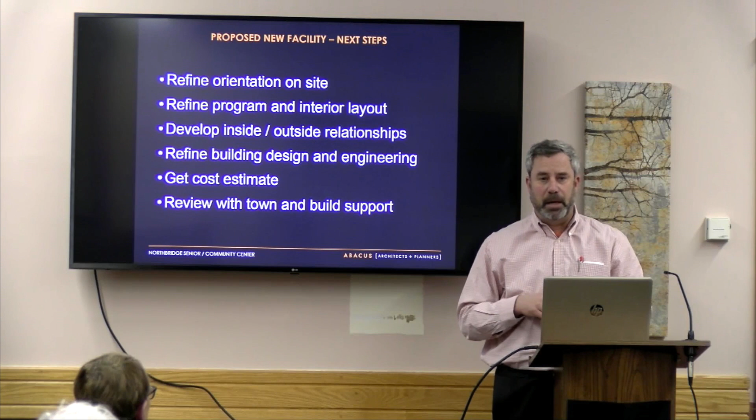Our plan is - a lot of this is David's homework to do - we're going to move forward into April, ahead of town meeting, and come back with another forum like this, fine tuning the design, plus having some solid cost estimates. I'll have another timeline associated with that. I do have some numbers here, but they're very preliminary. I can talk about them and anything else you want - I've got the night set out for you guys, so happy to answer any questions tonight.

We'll also have a forum again in April on this, going to town meeting. We have a number of other projects and issues with different forums - we're having one on the Quaker Street landfill contamination next week with the Board of Health. A lot of stuff going on in town, which is exciting, and please feel free to reach out with any questions.

So the goal for town meeting is to get authorization to borrow money to build whatever we decide to build. It's authorization to borrow, which requires two-thirds of the vote at town meeting - not a simple majority. Because it's borrowing, we don't have the money in hand, and when you do a project you have to phase in as you spend. We need permission to borrow.

In addition, we will need a ballot question two weeks later at the annual election for the purpose of excluding the debt from the limits of Proposition 2.5. I'm not going to use the word override, that's different - that's operating. This is debt, and we have different debt service in hand right now. I don't have those documents yet, I'm working on them - I'll have them at the next meeting and put them online. But the debt we have right now is for the new Balmer School, also known as the Northbridge Elementary School.

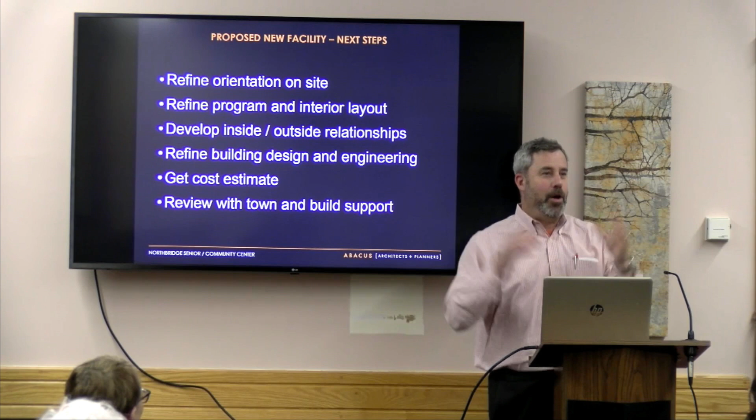All right, so the good news is, when I walked in up here, you guys don't have anything to worry about. Harry Berkowitz offered to pay for the whole thing.

So this is going to be hard to see, but this is what a debt schedule looks like. Again, I'm going to put this on the website. I'm going to walk you through this, and there's a lot of other documents that I'm going to have that are related to tax dollars.

So one of the things I'm going to have up there on the website, and I can do it tomorrow, is what the tax rate currently is in town, and what goes into that tax rate. I think it's about $9.65 as the base tax levy, and then everything up to $11.79, so call it $2.14 ballpark, is related to the debt that you have already approved. $11.79 is the current tax rate in town.

So what this does is it takes a look at what the current tax rate is, $11.79 as of today, because I don't know what it's going to be next year, and what the current property values are in town: $2,789,375,840. And then it assumes a borrowing rate of 5%, a borrowing term of 30 years, and a cost of $15 million.

So that's just a ballpark, we don't have an exact cost yet. In discussions that David and I have had about the cost of senior centers and what other projects are going for in the current climate—before the tariff situation and post-COVID, so we're going from one crisis into another—it's about $900 to $1,000 a square foot. That doesn't necessarily include site work, design, or a snowmobile.

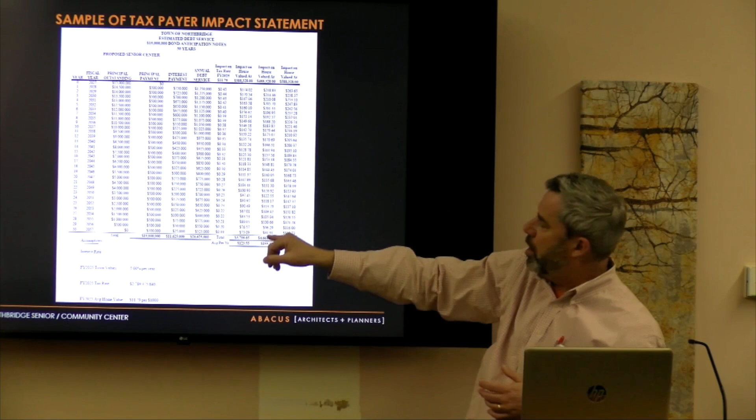And on the lower end, $123 a year for this $15 million project. The first year is going to be higher, then it goes lower. The first year is $218 in the middle, and at the end it's $91. But the average of that is about $150 over the course of the 30 years.

So I'll have additional information. I just want to get some ballpark information out there because I know people are concerned. How much is it going to cost me? Is it $1,000? Is it $3,000? Is it $20?

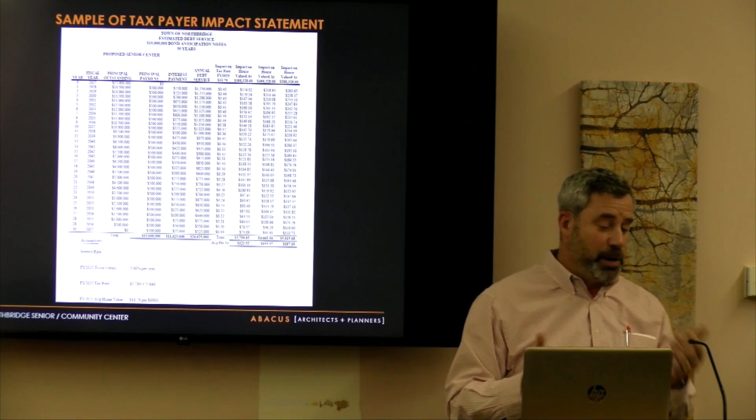A couple things we do when we do projects, we did the same thing with the fire stations. These people expected to provide services to this town have certain expectations, and the people that utilize those services have certain expectations on what they're going to get back, and the need. So we're trying to balance all the great ideas that you have with the affordability factor in every town, and obviously here in Northbridge for everyone.

And everyone, I can't tell you when you go to the ballot if this is good or bad for you, that's a personal decision. My job is just to get you the information you need to make the decision for yourself, whether this is a project you want to vote for, whether you feel like you're getting the benefit, and whether this is a worthy cost to pay for it. All that comes together, and then you decide whether it's a yes or no.

So, having done this for a long time on different projects, I have good expectations in terms of what you'd like to see at the next meeting. But I'm happy to answer any questions on this or anything else to do with the project if anyone has any.

Sorry, how long is it going to take from start to finish? For construction, from the time, from May, I'd expect probably a 2-year timeline. The fire station was a little bigger, we probably moved in after 2 years, but the closeout was a little longer. This is a smaller building, about half the size, and a lot less of the intense type uses compared to the fire station. I'm using it as the most recent example, but I'd say ballpark 2 years.

One of the things we have to do, just to answer that - a lot of people say 2 years is a long time, I can build a house in a year. Well, we have to follow Mass General Law as a town. We have certain restrictions, we have to advertise - everything we're designed to do is designed to be open and fair competition so we ensure getting a properly qualified person to do the work at a proper, fair price.